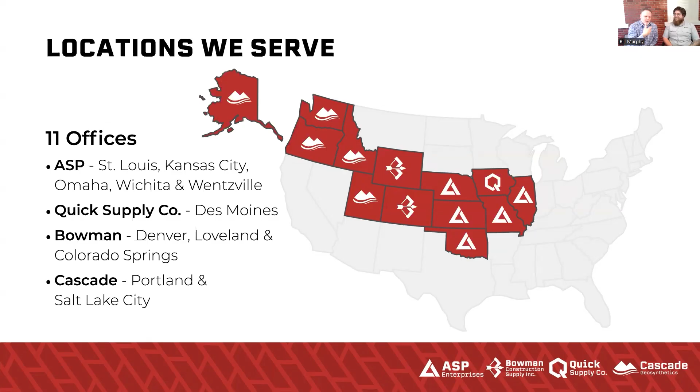Here's the map of the locations for the four companies I've mentioned. We've added Wentzville last year, and we're really excited about the growth we're seeing in some of these parts of the country. But if you see a gray area and you're from one of those gray areas, it doesn't mean we can't be friends. We have friends that do what we do across the country, and our manufacturers work across the country and across the globe.

For those of you who are familiar with us, this is repetitive again, but our site solutions - at different locations across the United States, we have larger yards or larger warehouses, but we all can provide the same library of solutions, tools for your toolbox.

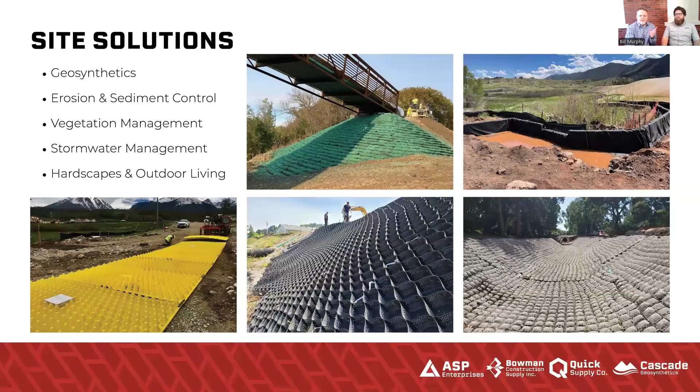We found out during COVID how blessed we are with this slide here. With our massive inventory, we're a small family-owned company with a very big presence and a very big ability to work on large projects. We eat daily on our small projects, and we have our regular customers that keep the traffic flowing at all of our sites. I'm watching a truck drive back to a yard now to be loaded up, but we can work on very large-scale projects as well.

We partner really well with our manufacturers and our suppliers. And I really love meeting all of our warehouse and driver staff at all of our different locations, because that's where the rubber meets the road, so to speak.

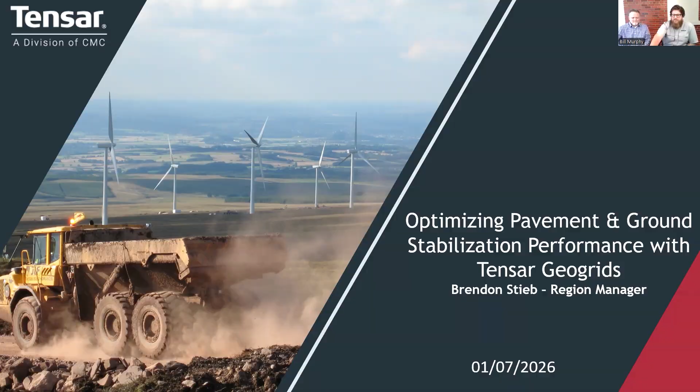As an introduction, I'm Brendon Stieb, I cover South Dakota, Nebraska, and Iowa for Tensar, a division of CMC, which is Commercial Metals Company. Mobile number and email are there if you need me.

Like Bill was saying, sorry if you saw the LinkedIn posting or the headshot at the beginning of this slide deck, definitely not as clean cut and young as I once was. I think the construction industry put a few years and some gray hair on my head. So this is a little family picture just to have you guys get to know me. We've got Taco the cat, Op the dog, my wife Cassandra, and we are expecting a baby girl in May. So very excited about that.

That's why I said you're going to have to learn how to sing in front of an audience. Yeah, so absolutely, like I told you off camera and off mic, if you don't know the words of the songs, just make them up. Your kid doesn't know either.

All right, jumping into the agenda, guys. We'll go through some safety, quality, environmental, just a quick slide I wanted to touch on there, and then get into the GeoGrid overview, applications where we use GeoGrid, and then we'll go through some case studies, best practices, and examples.

Hopefully that sounds all right for everyone. I know we're all muted, so is that all right for you? Yeah, I think it sounds great. All right, they'll hold you accountable.

I wanted to touch on safety, quality, and environmental, and safety for sure. Kind of a nod to Bill's company here with Quick Supply, ASP, Cascade, and Bowman, as well as CMC, who purchased Tensar recently. We always start with safety culture.

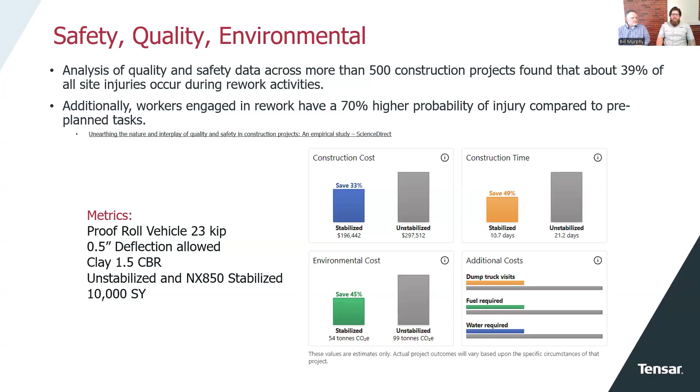So kind of keep these three pillars in mind as we go through this presentation.

So let's actually get into it. We'll talk about what is geogrid.

Bill has mentioned that the Hale Holdings companies are a distributor for many manufacturers, and they do a lot in the geosynthetic world. So a geogrid is part of the geosynthetics umbrella.

Geosynthetics can include and do include geogrids, geotextiles, both woven, being high strength or low strength wovens, non-wovens, geomembranes, geocells, anything to that nature. I'm not sure if I'm missing any.

You're doing great. Sorry, I was just admiring a Corvette that was rolling by. Yeah, so each of these are going to have different functions and projects, whether you need stabilization, filtration, separation, total confinement of materials, total separation if you're working in ponds or landfills, things of that nature.

All the above. So geogrid from a Tensar standpoint, we have three, we call them stocking SKUs. These are the three that our distribution networks will have in stock for projects on site so we can get quick delivery. Those three are going to be the Interax, which covers NX 850, 750, and 650, which is on the bottom right of the screen, the white one there. Then the HX series, which also has three: HX 165, HX 5.5, and HX 145. And then biaxial geogrids, most notably the BX 1100 and BX 1200.

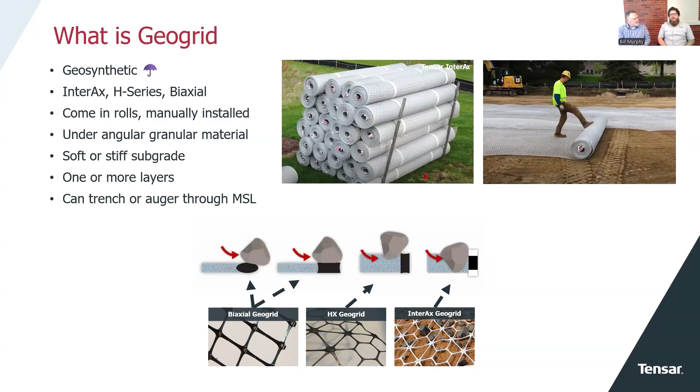Just a PSA here at the end. We get this question quite frequently, or we have people come up to us and tell us that they refuse or don't want to use geogrids in their specifications or designs because they might have to come in at a later date and do something with maintenance, utilities, or reclamation—full depth reclamations. It can be an issue. Just as a PSA here, a proof of trenching or augering.

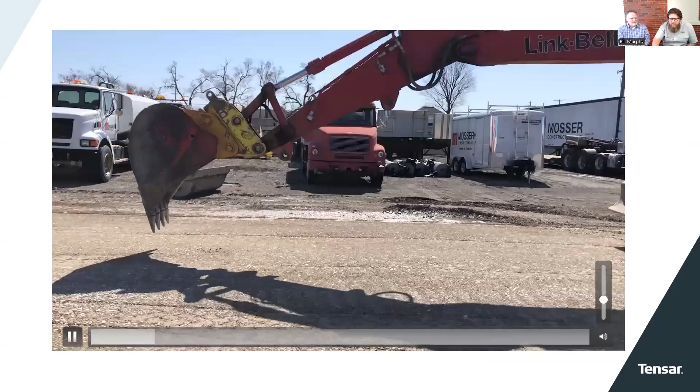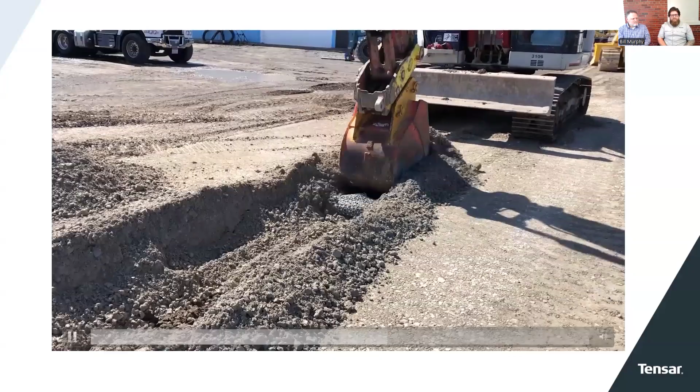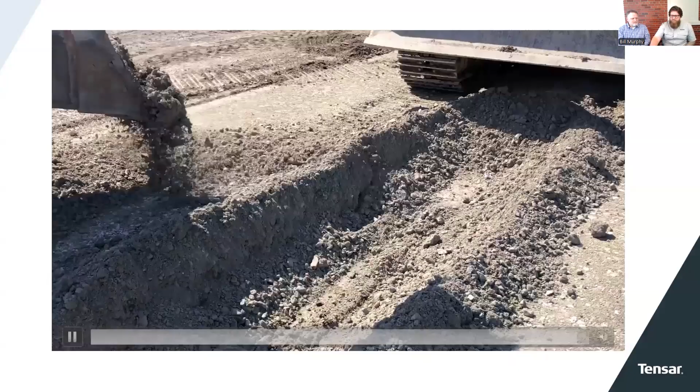It's all set up so you can actually hear the popping of it ripping. Just as easy as it comes out, it's easy to go back in and replace—just cut down a roll, place it back in, fill over the top, and it's not brand new, but good as new. I like that video, it helps tell the story. Yeah, I like to hear the popping of it.

The different classes of geogrids—the InterAx, the H series, and the biaxial—all improve bearing capacity in a little bit different variations. If you think about a biaxial, you have an X and a Y, so you're only distributing load in a vertical and horizontal X and Y. We call it radial distribution with the multi-axial geogrids, so the HX and the NX spread load concentrically out throughout the width and length of a geogrid. Well said—concentrically, that just flew right off your tongue there, good job.

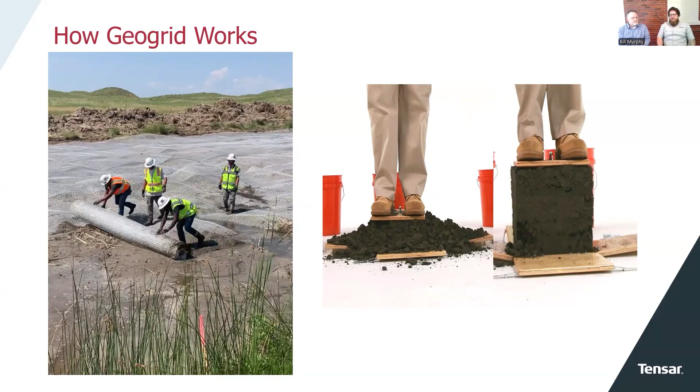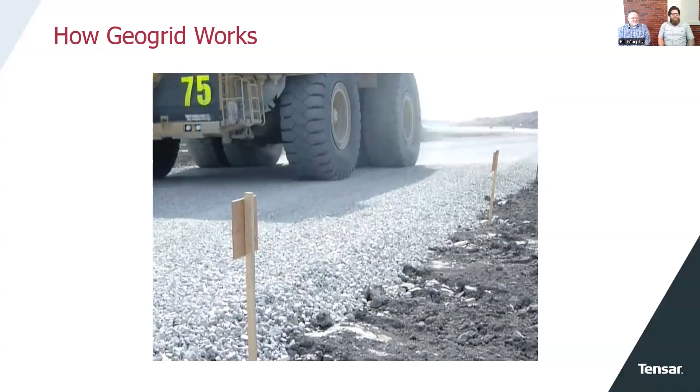Now that you know how geogrid works, here's a properly engineered solution video that I'll show you here quick. See if that rolls. No audio, this one does not have audio. Go ahead, you can narrate it. It looks awesome, I want to drive that truck.

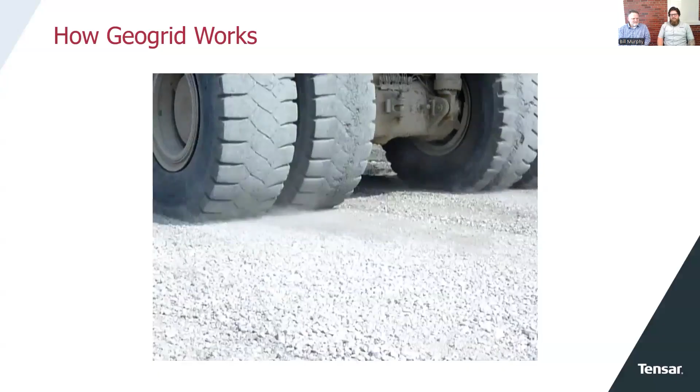And you're going to go right off the geogrid right there. Yeah, you can see where the end of the geogrid is, so total failure. I'm biased, I really like this video, I think it's cool. It's one of the first ones I watched when I started with Tensar and was like, wow, okay, that's what geogrid can do.

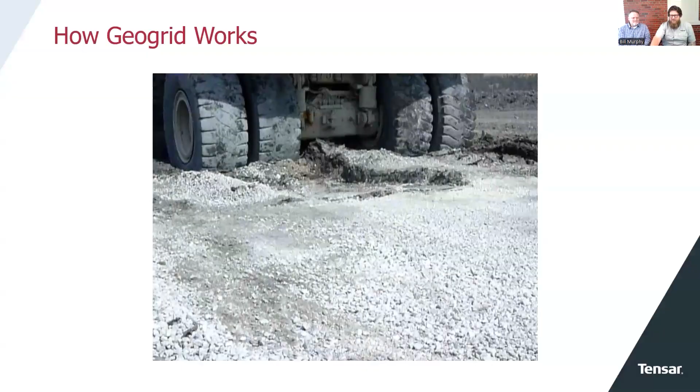This one has, let me get to the end of it. So jumping into geogrid's primary applications, anyone familiar with geogrids is going to know that it works really well in stabilizing soft soils. This is where we get generally most of our calls - if it's rainy, or you open up a highway project with a high water table and silty soils and you bury an excavator, this is a perfect opportunity to call your Tensar representatives.

A little less notable or significant, but becoming more prominent, are building firm working surfaces, working platforms, whichever nomenclature you would want to hear. That's when we're using any sort of heavy equipment and trying to build structures, or we have a heavy haul road where we're pulling material in and out from laydown areas back to the project site, things of that nature.

We can enhance - I saw you smile. I did, you're not covering your mouth. If we had an audience sitting there, I'd be smacking you with the ruler.

Bummer. So third here, we have enhanced pavement service life. We'll go through an example of that, but it's being able to increase the amount of traffic that a road can see, whether it's unpaved or paved.

In the rail industry, we can stabilize ballast and subballast. This is huge in any sort of renewable industry or petrochem, anything like that. Usually we have some sort of rail station coming in and out of there, so a big opportunity for us.

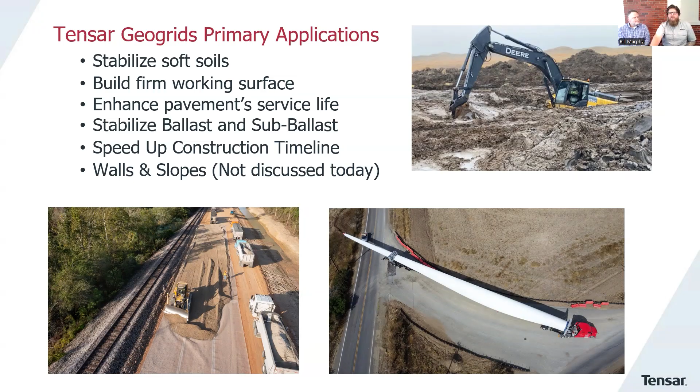Hopefully you didn't come today to learn about walls and slopes. Tensar does have geogrids that we use in reinforced slopes and walls, but today we're going to be talking mostly, or all, in horizontal applications and not in walls and slopes. But you have people on your team that are very good at walls and slopes - absolutely reach out to me and I can put you in the right camp for doing walls and slopes design.

So we will jump into each of these applications called engineered solutions for us. To start with, we'll just start with the one that's most notable, which is stabilizing soft soils.

This is a project in the Midwest that was post-bid. They were already starting their work and for some reason had a rainy season during the summer months, trying to get this project completed before the harvest. Essentially, they were trying to replicate the building you see on the right because they needed more volume for the grain that was coming in. They were unable to pull in any equipment to erect the walls for this structure, and therefore needed something quick to get back on schedule with.

The soil here, if you're familiar with loess soils - pretty common here in the Midwest - it's a soil that as it gets any sort of moisture, loses all structure and can be really greasy, oily, and squishy. So definitely needed to get something done here.

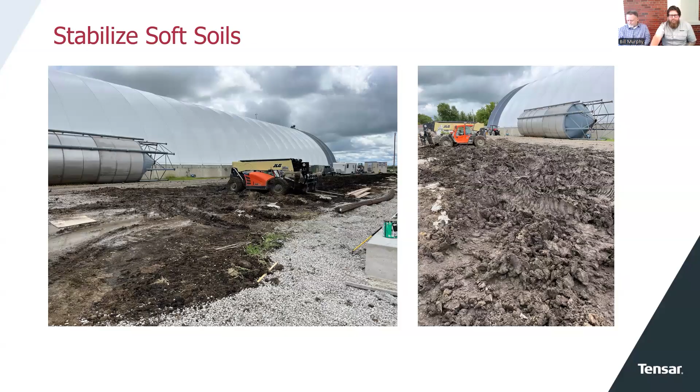We were able to scrape off that top layer and get this project closer to a grade that was going to be constructed.

This is a Tensar offering, a DCP test - dynamic cone penetrometer. But I do want to make a note: this isn't something we want to take away from geotechnical engineers. We always wish and hope the geotechnical engineering person on contract actually goes out and does the soil testing. But in a pinch, you can reach out to your Tensar representatives. We all have DCP tests, and we can go out and do these.

A little explanation on how this works: you have a rod with a cone at the bottom and a 17-pound hammer that you raise and drop. Depending on how soft the soil is, you'll get either deeper or lower penetration. We take readings on those, and you can model the top 3 feet of soil with this tool.

I have 2 tests here that we ended up taking, and it shows the difference even 20, 15, 30 feet can have on a project site. When we give our recommendations, typically we want to use a worst case scenario, but there's a bit of an art to it where we can blend both of these.

So for this example, the depth is on the left side of the chart, and CBR is on the top. CBR, California bearing ratio, is just the shear strength of the soil. As you get further right on the chart, the more competent it is.

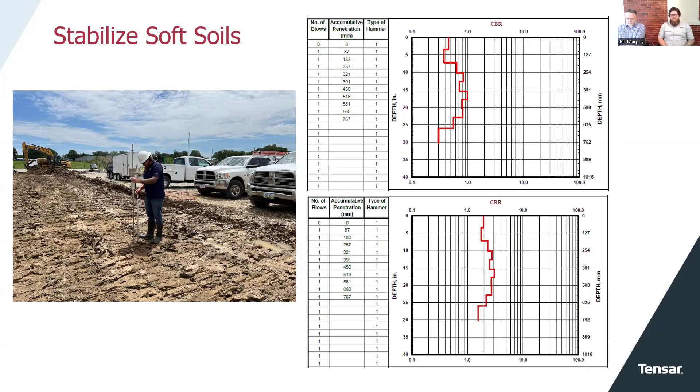So this is why it's important that we go out and actually do a model of the soil at that time. For this project, we ended up using the worst case scenario - they didn't want any point of contention, point of failure, because this thing needed to go.

The other input we needed was the expected traffic. For this one, it was all 18-wheeler tractor trailers - the grain trucks and trailers coming in and out of the project site. We designed this to 100,000 visits, or 10,000 visits over 10 years, with a certain rutting parameter allowable for the engineer with little to no maintenance - in this instance, I believe 2 inches.

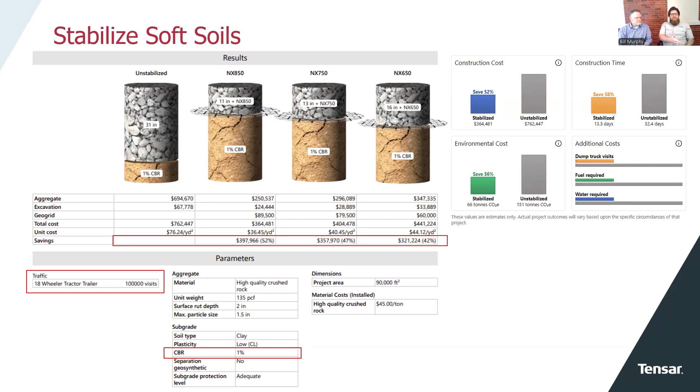You'll see another cutout on the right side showing construction costs at the most. These are all estimates, based off of material pricing as close as we can get. But we're saving 52%, and saving 58% on construction time, or 13 days, which was huge for this project—they needed to get the structure erected for the harvest season. Then on environmental cost, saving 56% on carbon emissions over the totality of only this portion of the project, which is pretty significant when you think about all the work that actually had to go into this.

Based on material stock for this project, we actually did two different sections from the previous slide. We did all the outside in NX850, which was the 11 inches. Then on the inside, where there was only going to be static loading from grain, we did a different section with the NX750, I believe 13 inches, based solely on not being able to get equipment in and out of there, continuing soft soils, and a rainy situation.

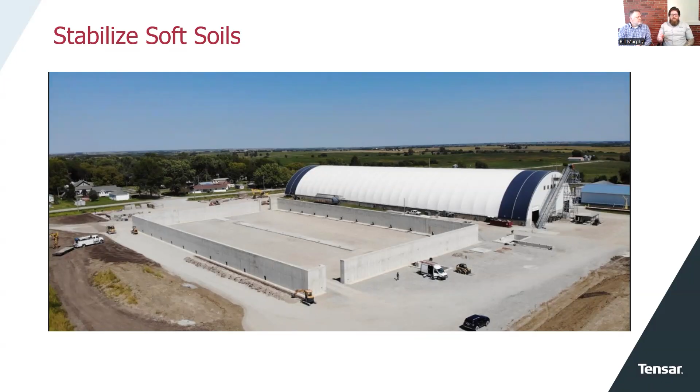Just to highlight that not every project has to be one size fits all—we can work around depending on traffic and things of that nature, and kind of hone in the value and which SKUs we need to put in on a project.

Let's talk about another stabilization project, but this one is different in that the subgrade was different, and this was more to do with compaction.

This is a design—it was rude of me to do that to you. I know, right before the... yeah.

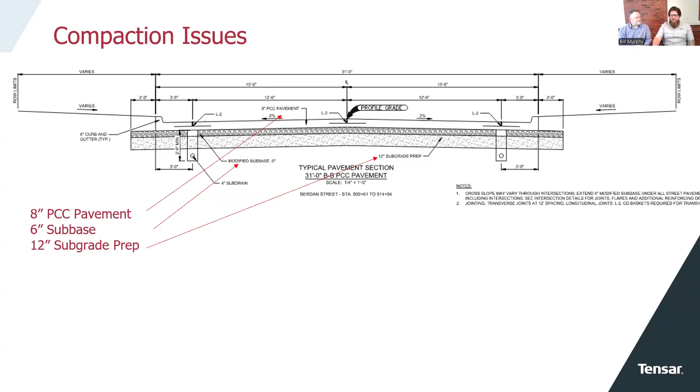For this one, we were sent this cutout from the engineer. This was going to be a low volume road, but it had highway access, and there was going to be some heavy equipment or heavy traffic due to multiple industrial sites in town. We have an 8-inch PCC pavement, 6 inches of subbase, and 12 inches of subgrade prep planned for this road. Based on the state's manual, the estimated traffic was 3 million ESALs, which is an equivalent single axle load—just a value given for how much traffic is expected for this roadway.

You can see here the boring logs that were sent to us, and the two mainly in question are 7 and 8. As the project came and they scraped away the top layer to get to the grade they wanted to actually design and build this roadway with, everything kind of went away, and it was all silty fine sand.

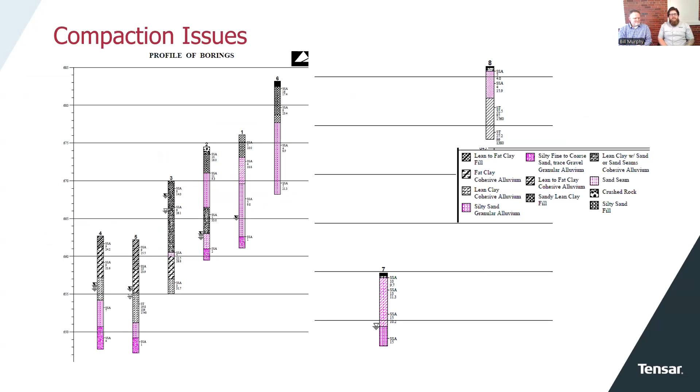What we had at the time as well was heavy rainfall in the area, and when this sand got wet, it lost all of its competency. When we actually went out to site to do the subgrade analysis, we noticed it was in a super cool environment, heavily wooded, heavily shaded, and there was just no drying the sand out. They tried multiple rounds of subgrade prep, to no avail—they couldn't get the compaction they were looking for.

So the design we were working with, based on recommendation through engineering and the contractor, was to try and stick around with the grade they had already dug this thing out to, which was 12 inches.

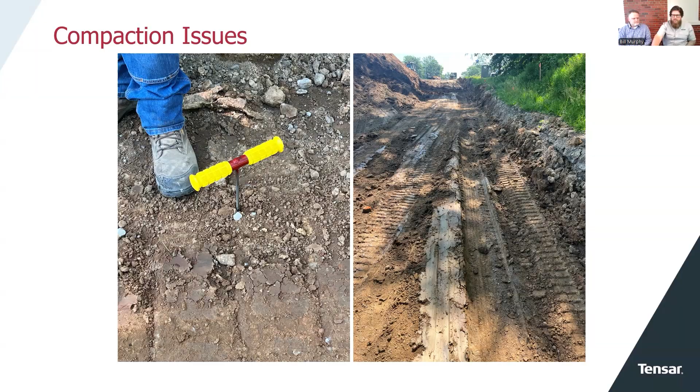So we ended up going with an NX850 install and kept the 12 inches of material for them. The main concern for this one was the amount of traffic it was going to hold unpaved. Due to the town it was built in, access from the base of the hill wasn't allowed because they didn't want to damage that roadway. It wasn't designed to handle ready mix trucks.

So that's awesome. Hey, you're just past halfway. Okay, perfect timing on the slides. Get a drink, and then I'm going to check a question that came up over here, if I can do it without ruining everything for us. If I ruin everything, we'll just start all over again. I'm just kidding, and I'm not sure if we're going to get to this.

Yeah, so this is a good friend of mine, Matty Gibbler. Do we have a savings comparison to lime stabilization versus more aggregate? Is that part of the initial tool, or is that more in-depth? That's going to be more in depth, and it's going to change project to project, depending on the actual depth of tilling that we're doing with a lime or chemical stabilization.

I've also seen in a chemical stabilization bid tab, things can kind of go from lime, fly ash, or cement contents, you have water. So it does kind of get a little gray on what material is actually being used, and what pricing is being used for a cement or lime stabilization.

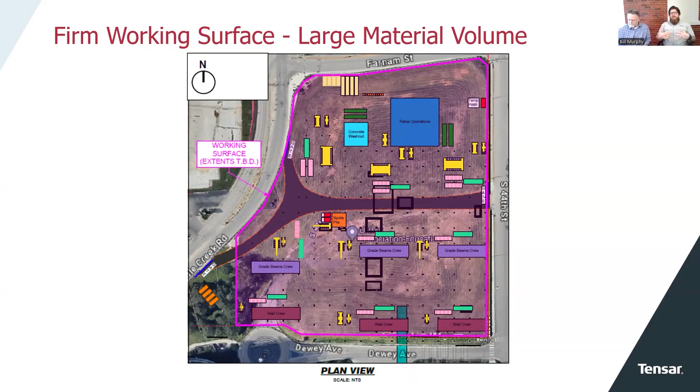So this is a hospital expansion, and there were two key factors to this project. You can see all the yellow equipment that was on site. These are all going to be the crawler cranes and drill rigs, and where they were planned to be during the extent of the project. And then that blue shaded rebar operations area was all going to be lay down and storage for heavy equipment and equipment coming in and articulating and pulling and putting material in.

So the design used for this was based on the equipment table on the right with the peak allowable ground pressures. We had the drill rig and the crawler crane, and the engineer had this as a dual layer. So I mentioned you can use multiple layers of geogrids. You'd want to put, if doing this grid on native subgrade, whether it's clay or whatever, put rock on, then halfway through your section put another one, then more material on top of that.

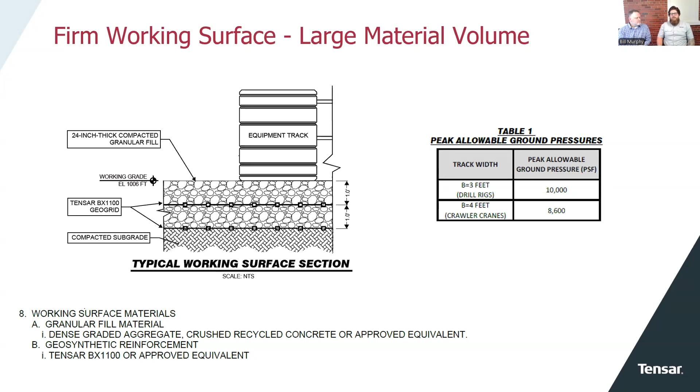For this instance, calling out Tensar BX1100 or equivalent, we have different products that can reduce the amount of material based on the performance of the grid in this situation. So what we were able to do, step one was to piece together a new design which the engineer would consider equivalent or better for this scenario. The project specification required that the subgrade pass proof roll before the rock actually be placed, so there wasn't really a worry about having soft soils for this unless weather became a factor.

The input that was used for the native subgrade for this one is based on the calculation method: 1,500 pounds per square foot, and that's the undrained shear strength that we used.

The design methodology that we use is a T-value method, which I'm not going to go into detail on because it's very complex and would probably take an hour on its own, but we have people internally that can walk you through it. If you want to reach out, we can set up a lunch and learn on it. But the section that we used was 12 inches with NX850.

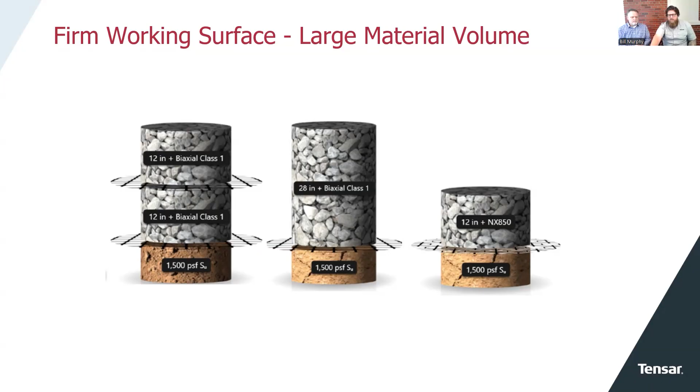Any sort of heavy equipment, we wouldn't want to go below 12 inches, especially in this scenario with how heavy the crawler crane and the drill rigs were going to be. So this section actually performs much better than the two sections on the left with the 12 inches and NX850.

Step two, prove the solution works. This was all based on a factor of safety, a bearing capacity factor of safety of 1.5, which you'll see in the table.

Unstabilized was never really going to happen, as the project was already designed with stabilization and geogrids in it. The way our software puts these out, it automatically classifies it with an unstabilized case. But the point of this was to show that through this addition of the design with the T-value increase, we can pass the bearing capacity factor of safety of 1.5 with 12 inches of NX850 for this certain piece of equipment.

So I noted that I need to mention the T-value deal without going into too much depth, but it's derived from the relationship between mechanically stabilized layers and the increase in T-value. It's a design methodology that's in DFI, and that's about as far as I'm going to go.

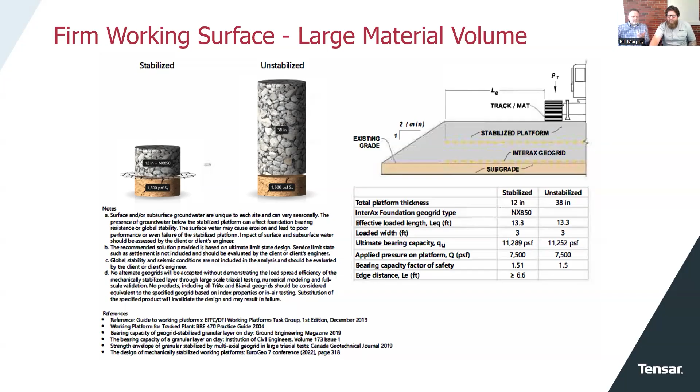That's fair enough, but I like that you offered a lunch and learn if they want to get more in depth, or reach out to us. That can be handled with an email or phone call as well. We'd love to follow up with you.

Again, construction cost estimate. Unstabilized wasn't going to be a thing, but I highlighted what key point I wanted to make on this one: the aggregate base is substantially more when we use 24 inches versus 12, and the geogrid price on NX850 is much more than the BX1100, but as you can see in the total cost...

We're able to save around $221,000 over that 40,000 square yard project, and that goes back to the grading contractors, the general contractors, and the owners, however they decide to split that out, since this was actually in a pre-bid phase. Yeah, that's a big number.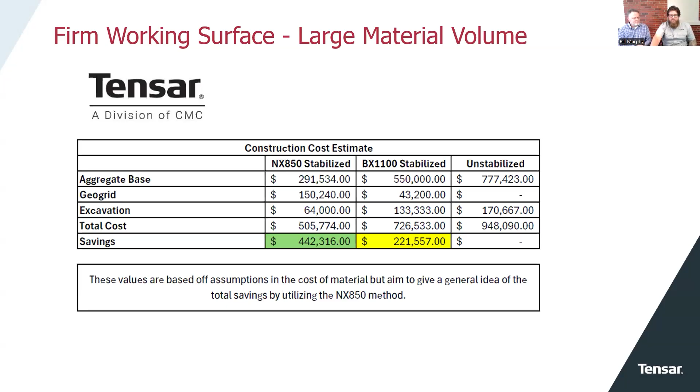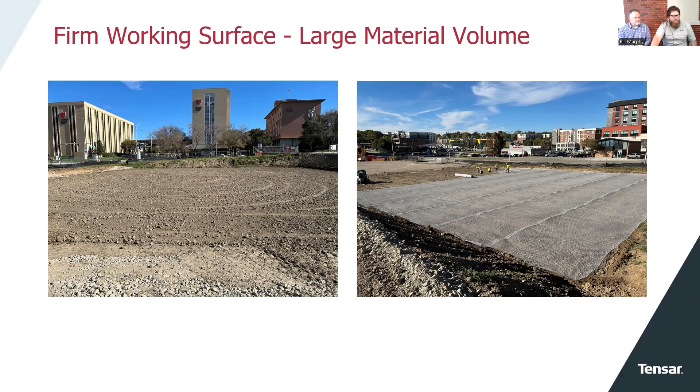Let's talk about another pre-bid design, firm working surface project. Again, working surface here. So we had the design that was originally the 12 inches and BX1100, and the subgrade itself was competent.

Again, 3% CBR is considered passing proof roll, and that gives the shear strength for the soil. There was a lot less that went into this one. This is an engineer that uses and specifies geogrid all the time as a factor of safety bonus.

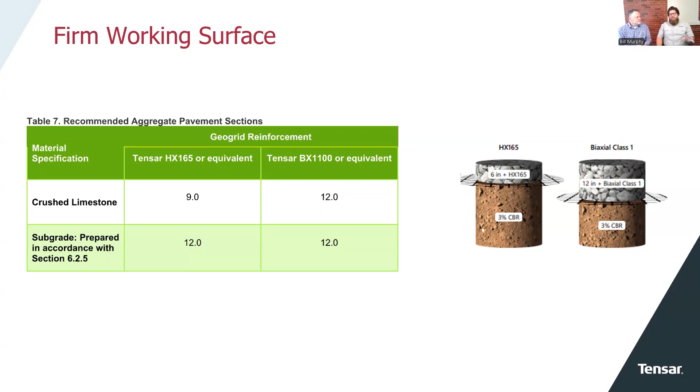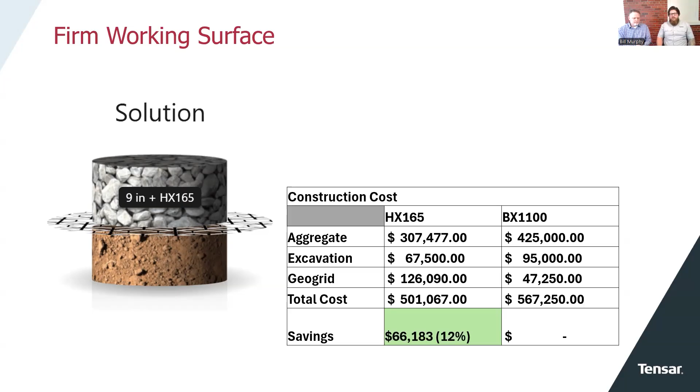So we were just able to show, hey, you can use a BX1100 in this case, or are you open to investigating other solutions that might save time and money? Based on the equipment on site and the articulating nature of some of the equipment, we could have passed with 6 inches, but we used 9 inches for added factor of safety. This ended up being a much better solution for the engineer, contractor and owner, and still saved 12%, which isn't as significant, but still a drop in the bucket.

Maybe 1% or 2% of the actual project was the geogrid install. Another nice thing about this one was we went from the specified crushed limestone to a crushed concrete, which was an additional adder for the money saved. Like I mentioned, you can use crushed concrete in lieu of crushed rock.

I want to put out a disclaimer that this is not the case nationwide. We're lucky in the Midwest with the quality of concrete that's been put in, but I've talked with colleagues in the South who really stay away from any crushed concrete. What I will note is that the new multi-axial nature of the geogrid does confine non-quality materials a lot better than biaxial geogrids have and do.

Definitely get in contact with a representative if you want to look at using less quality material. There's never an obligation to involve us. It's great to have these conversations, give a printout, and give some options. I think it helps everybody here, whether they're the owner, engineer, or contractor, consider their options. We all do that at home anyway, with our own money.

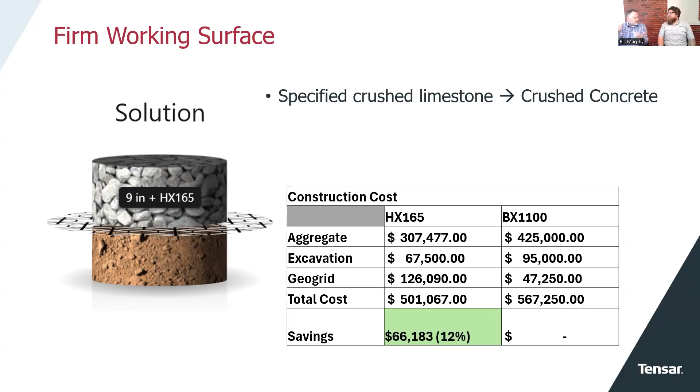There's no obligation. We're not going to tell you which one you have to pick. We can lean toward our favorites - I'm an engineer, so I'm pretty conservative, I like the better geogrid, I like a little more rock. That way, you're less likely to get a call back or have somebody disappointed 20 years later.

Yeah, you bet. Let me smell that glass. What's in there?

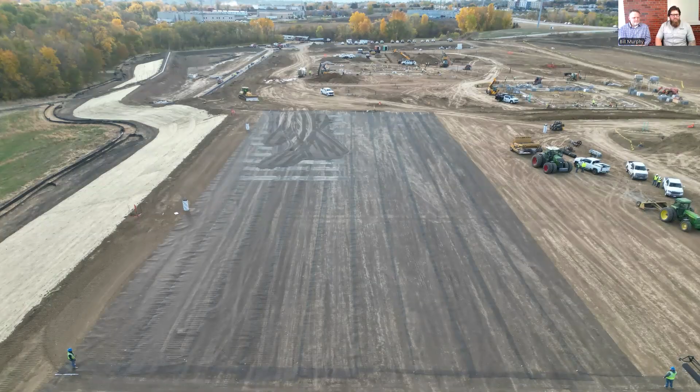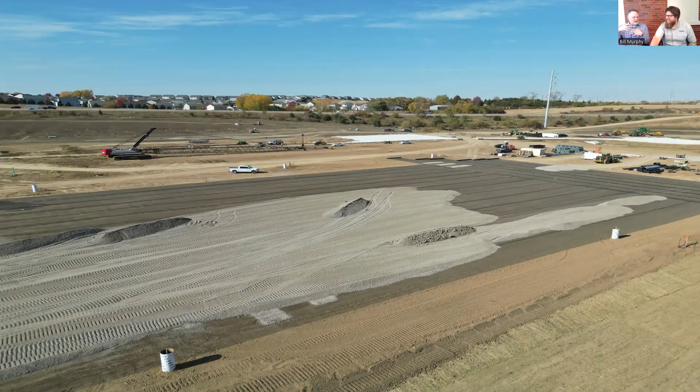Some more install pics. Here's a nice fall shot, and another one of the project being installed - spreading out rock, then more, and going back in and compacting. This one is sort of by my house, I drive by it all the time and I always smile. I'm a sucker for time lapse - even beyond our industry, I just love to see a story come together.

And I have the ADD or ADHD - remember we talked earlier - I don't have time to watch the whole thing, so I like the speeded up version.

Alright, we'll talk about pavement optimization and design examples. Most of the projects we've talked about so far have been cost savings - this is going to show more of a sustainability or longevity mindset. Kind of what Bill was talking about a minute ago: we don't always want to take out as much material as possible. As engineers, we're always looking for that factor of safety.

I think this proves the example of let's try to create and design a situation that saves money versus the original design, but let's add value - which is half of the wording of value engineering, we're adding value. But we're also able to save some money. So I'll walk through this example here.

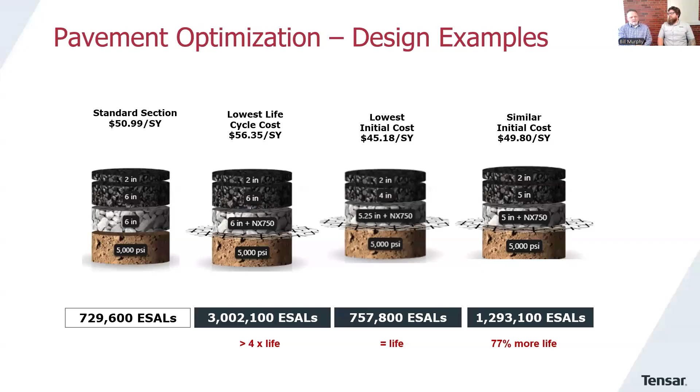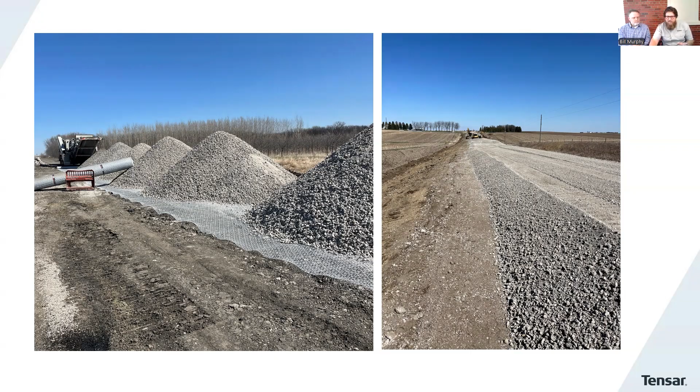The engineer had designed this with budget and longevity in mind. So what I'll show you here on the next slide is they actually created the road and left it unpaved from probably around the March timeframe to the September timeframe.

Again, this is the Midwest, a super agriculturally rich area, so they're going to have a ton of ag equipment coming through, potentially rutting up the road. If you didn't have protection for the subgrade, that would rut the subgrade, and then when you go to pave on top of that, you've already failed the most important part of this project, which is the subgrade. As the subgrade fails, you're stuck and have to go in and do another full depth at some point.

They did go back in for a second phase, I'd call it. Most counties probably fall on a June or July fiscal year, so you had half the project installed in one fiscal year and half installed in a second, which kind of speaks to my point on budget.

The longevity point of this is, I'm not sure if they came back in and scraped material off or if they just paved on top of that. But whether they did or didn't, they added more traffic capacity and more traffic value by implementing the grid, leaving it in place, and then coming in and paving on top of this. A creative solution.

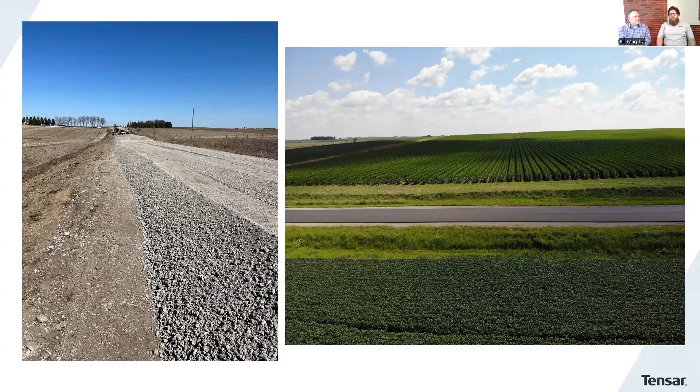The soils were super poor, so we have a 0.7, and they needed a solution because they had super heavy haul equipment coming in and out, taking materials to and from certain points on this project. So they called up and needed something quick. They needed to get back on schedule here.

We went out, did some DCP testing. We modeled the subgrade for them and came up with a solution that was either 33 3/4 inches of unstabilized material, or come in with a geogrid and knock this down to 13.5 inches.

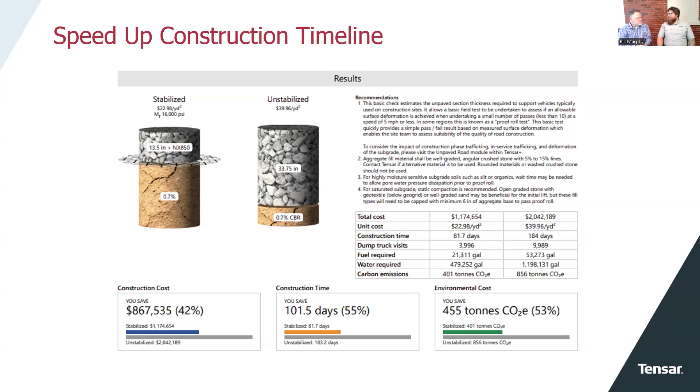Kind of wrap up that thought. But do you have anything else? I do. My mind races all the time.

Like I saw that Corvette at the beginning, and I heard a loud engine. At first I couldn't tell what kind of vehicle it was. But as you said that, it sounds like something an old person would say.

What do they say? An ounce of prevention is worth more than a pound of cure. So if you plan ahead, the prevention part is how to plan ahead to be more efficient with our resources, but also more efficient with our time. You and I talked about this last year during some lunch and learns.

The time savings connects right back to safety. You have fewer chances of somebody getting injured on a job site, but you also have less traffic, so less rock haul loads, for example.

I use that one all the time. A lot of our solutions, we're not anti-rock. This building was put here because of being a distributor of explosives in the mining industry. So Quick Supply Company, our parent company owned by Hale Holdings Company, Quick Supply, is in the blasting primarily for rock. So we are in rock quarries all over the country now. We're not anti-rock, we're about how to use that rock better or smarter.

My friends at a rock quarry here in Iowa, where we're sitting right now, said they want to use geogrid more on some of their projects, not because they don't want to use rock. They love rock, but they'd rather sell that rock to somebody else who uses it somewhere else. My pitch to county engineers and DOTs is, we're not anti-rock. How about you use less rock to solve this problem here?